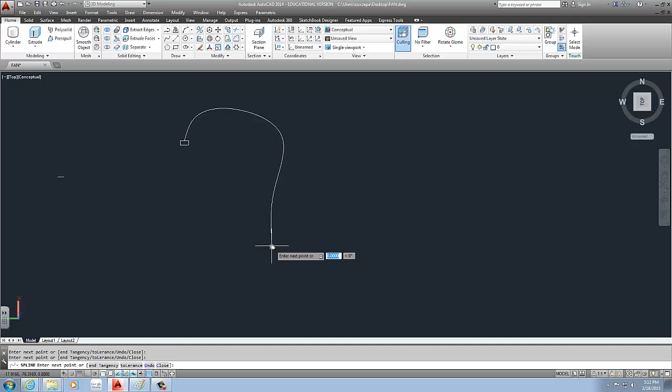So for this loft light, I'm just going to do a quick sketch of it so you understand what I'm looking for. It's going to be a quite simple design. But I can't really give you the dimensions because it's going to be up to you to decide what dimensions you want to place, and what shape you want to make it.

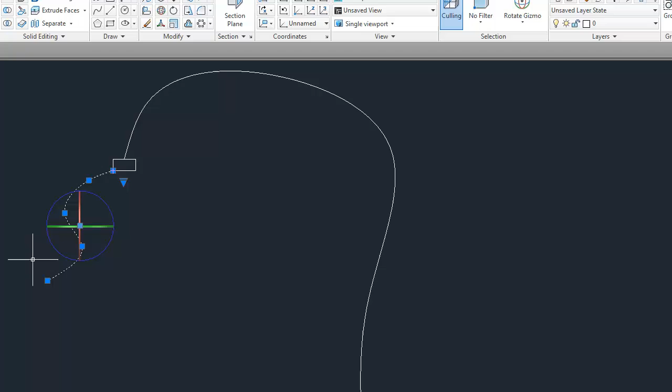So that's pretty much what we're going to be designing. Very simple light fixture for your desktop.

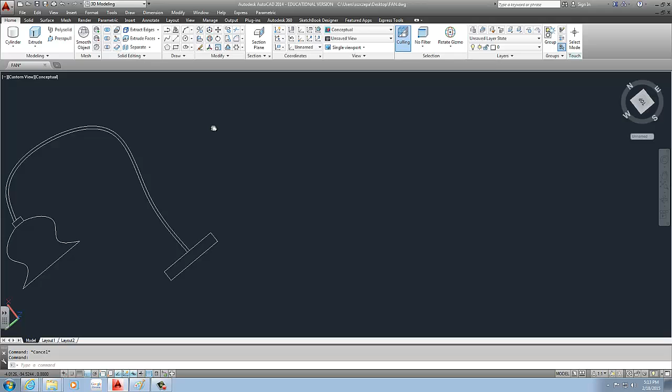Now to do this, there's plenty of ways you can do it. The simplest way is pretty much what I just did, is you draw yourself a reference drawing of what you want to do, what sizes you want to place, and we start out with the base. Pretty simple, we do a cylinder that is diameter of 6 inches.

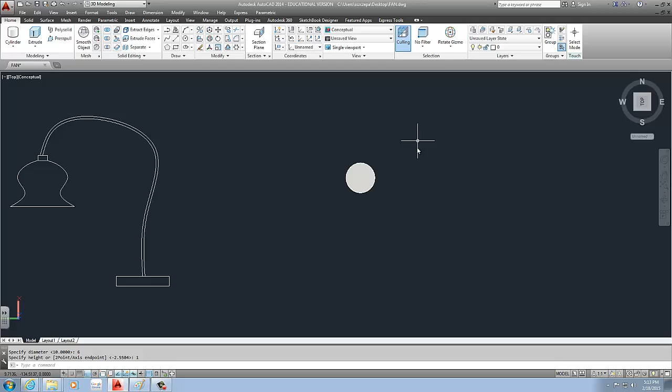We'll do a 1 inch high. You can change that as you wish, it's fine. Now we need to create the actual pipe, or the wiring pipe, or whatever you want to call it.

That's going to be like a flexible, so anybody can adjust it as they wish. I'm going to go into like a left view for reference, and if you want to create a line for the height you wish to keep it, you can do that as well. Change that to left.

I'm going to do a spline. Well, first of all, I'm going to do a reference height of 24 inches. And then I'm going to use our spline to create a free-shaped kind of wiring harness.

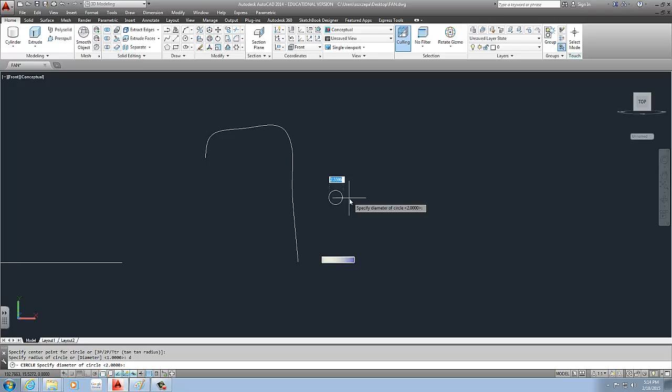Accept that. And I'm going to use a cylinder or a circle shape that is diameter of 1 inch. And you don't have to put them together to actually sweep it through.

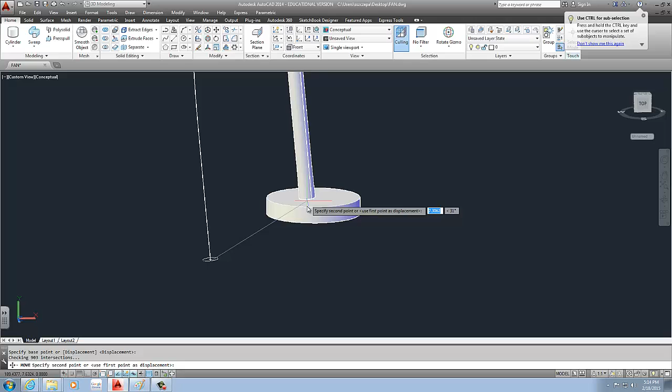All you have to do is use the sweep command. So under extrude, you go to sweep, you select the circle, enter, you select the path, and it does it by itself. Don't have to worry about anything about that. And then you can place it into the center of your base.

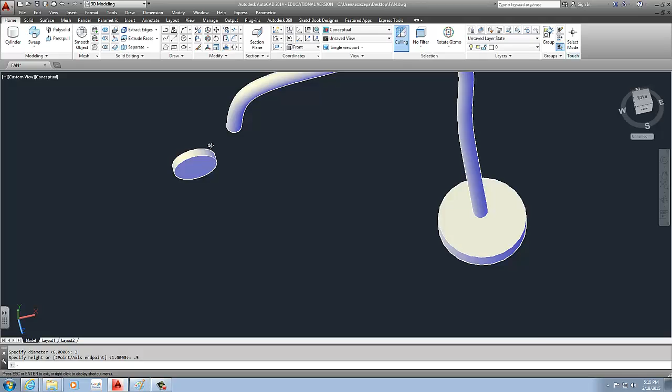So that's one, and then finally I'm going to create the metal portion before the glass for the light. Pretty simple again, cylinder, this time a diameter of 3 inches. And I'm going to do a 1/2 inch thickness. Now you might need to rotate this around to accommodate your design.

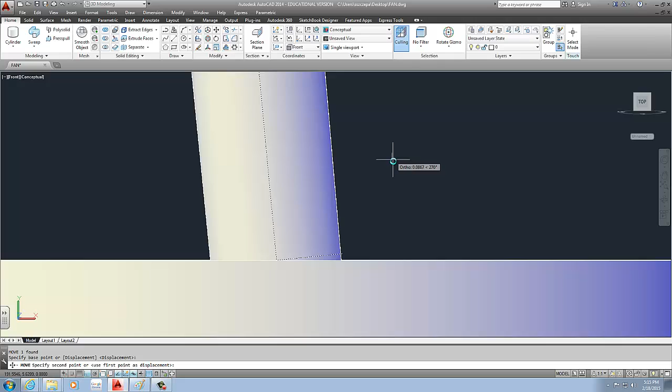So go ahead and do that. Now if you're not liking how your path of this pipe went, and it's crooked, or you want to cut straight into it, what you can do - see it's not overlapping here - I'm going to move it down. That's one option, or you can slice it to make it an even cut at the bottom.

Both will work. I have this, okay, and then finally I'm going to create the actual light or the glass. To do that, I'm going to use the spline command.

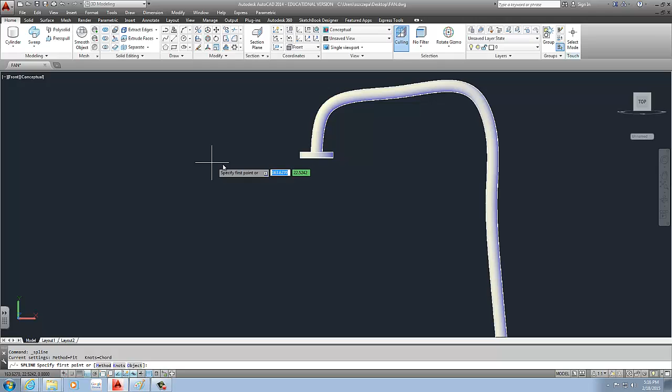But before I do that, I want to create the top and bottom shape of my light. The top portion will be a circle with a diameter maybe of 3, which is the exact same as that cylinder. I don't know where I lose it.

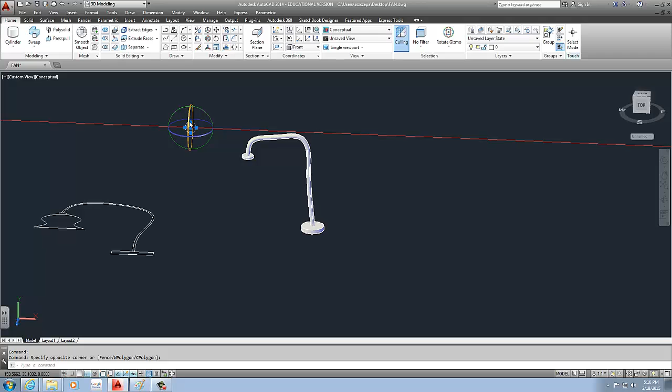Oh, so I might have to rotate it. Yep. And I have that piece. Now I want the base to be a weirder shape. I actually want it to be a spline, a free-formed shape.

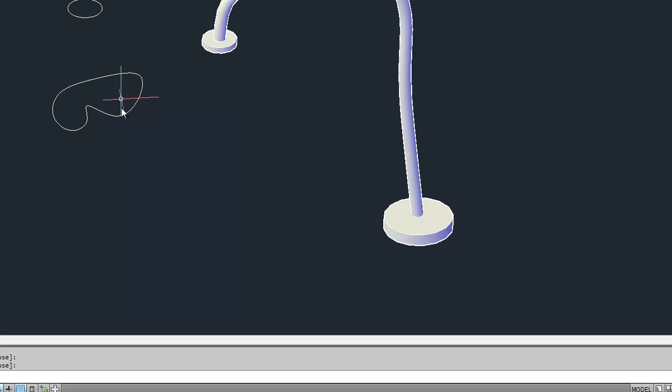This is probably impossible to make, but it should be interesting. Make sure you have ortho on when you're rotating, so it's exactly to match. Give it a distance that you prefer, doesn't have to be too far. Mine's about - I'm gonna do 6 inches.

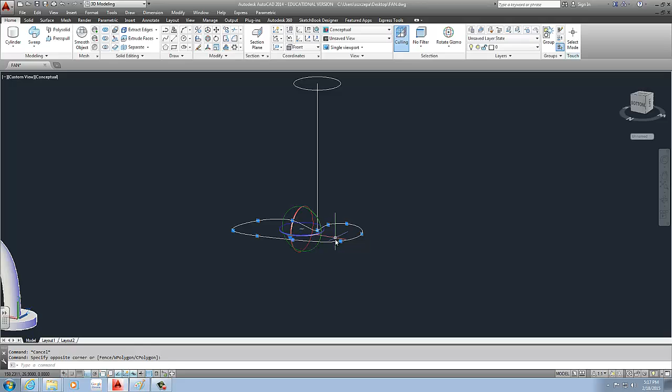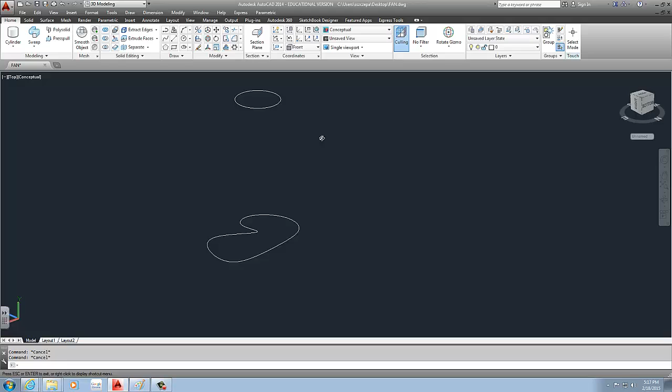So I'm gonna snap on my lower portion to my upper portion, like so, and adjust it to be somewhat in the middle. You can rotate into UCS or use the ViewCube to view and see where the middle is compared to your part. Once you have that, you can use this to create your loft glass, or what I try to do is make a copy first, to see what I come up with doing this loft.

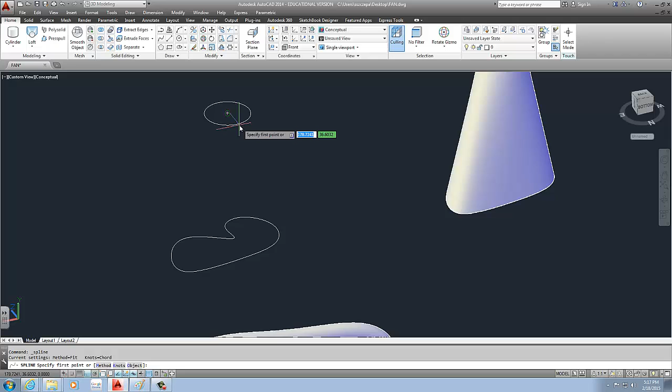So I get this shape here, or I try to give it paths that it can follow, usually by the quadrants. Is my quadrant active? Yeah, it is. So what you want to do is either select—sometimes you won't be able to select the quadrant, sometimes you will—and you create a shape that you want the loft to follow.

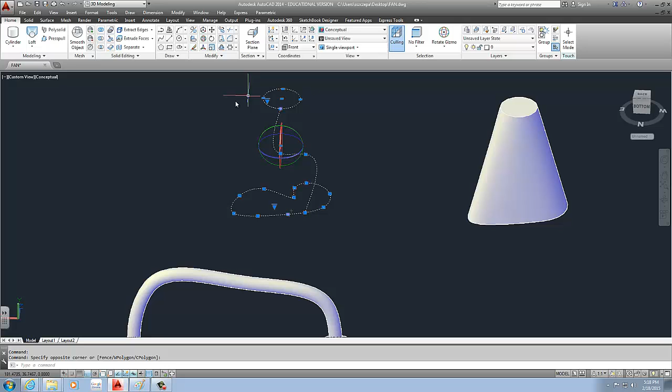So here's another option. I gave it one path. If it's one line, I usually call it a path. If it's more than one line, it's a guide. And if it's a path, it has to follow the path. If it's a guide, it just gives it a guidance of what shape it should be going to.

Okay, so that turn is too big. My guide will not work. And you play around with those shapes, path.

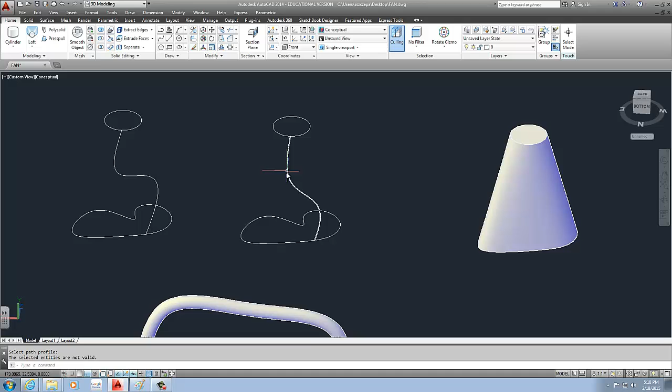Is this creating a solid, or is it just creating a surface? That's going to create a solid. So the only problem is trying to adjust it to make it work. See, if it's turning here too strongly, it won't work. So we have to adjust that to make it a possible part.

Now if you keep on snapping and it won't work for you, what you may decide to do is use a line as a reference and snap to that line.

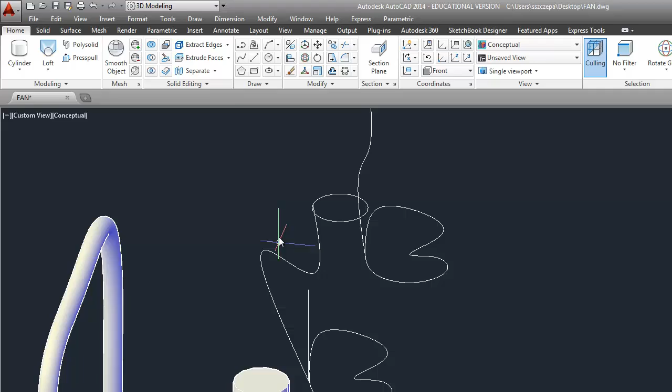Basically, loft just conforms one surface at the top to the bottom. To the bottom? Yes. Okay. But then you can use lines to guide it, or you can use a line for it to follow, that it has to follow. So for this one, it is a path.

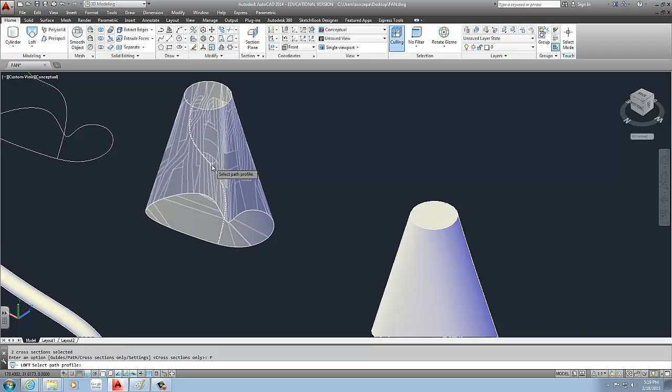There you go, so it follows that path. So you can really come up with some very interesting shapes. Now, the path worked on this one with a more reasonable shape. This one has an unreasonable shape—there's no way this can turn that fast and make it into that shape.

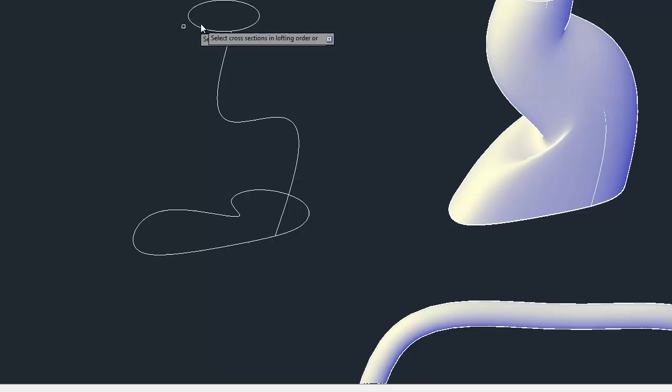But if I use the loft, I can use it as a guide. Didn't work, it's still too sharp of an edge. Try it one more time. I just adjusted it.

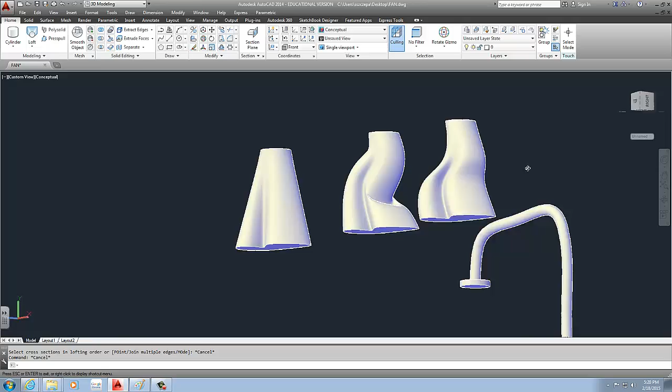There we go, and I created a new shape to that as well. All these shapes are nice. The only problem is once you create the shape—whoa, this one has a weird graphical error. It's there, but then if I zoom out, it crashes.

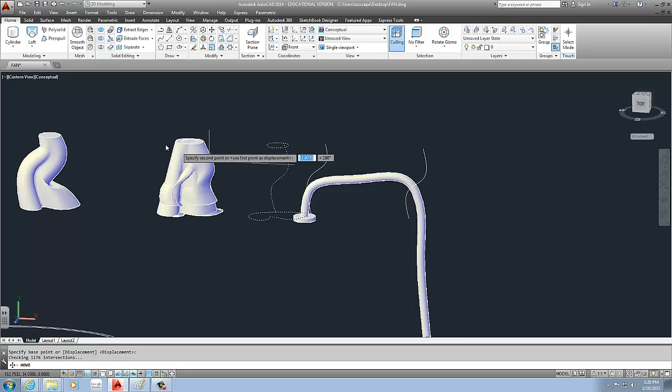But don't worry about that—once you print it out, it's going to be normal. What you can do is shell them out. The only problem with shelling them out is your computer could crash, so be careful when you do it. Make sure you save your work before you do any shelling of a surface or a complex part.

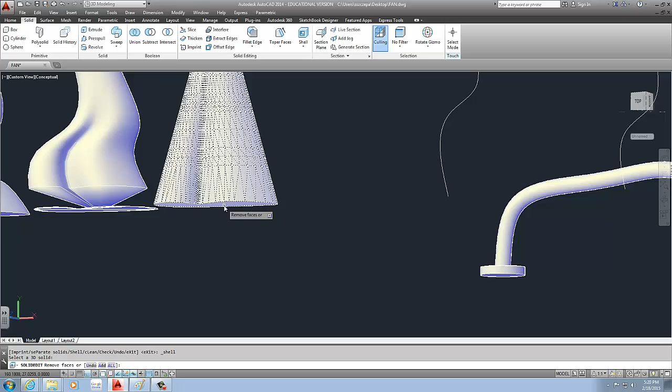But I'm going to use the shell command. I'm going to shell, select the object, select the surface I want to remove—which is usually the bottom and the top—and give it a thickness of 0.125.

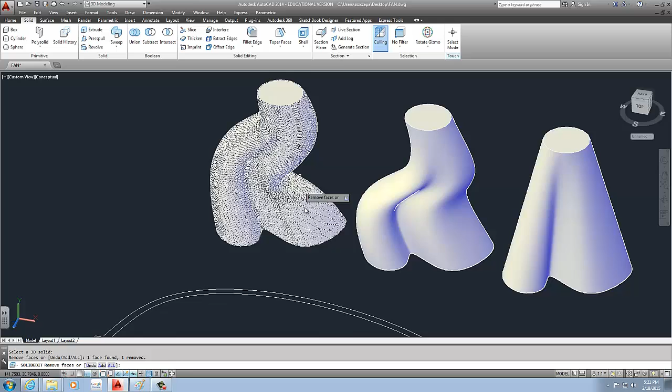Yeah, it crashed on me. Let's try it on this one. Shell, select... oh, it's not working. It's overlapping itself, that's why it's crashing. This shape is not something it wants to work with.

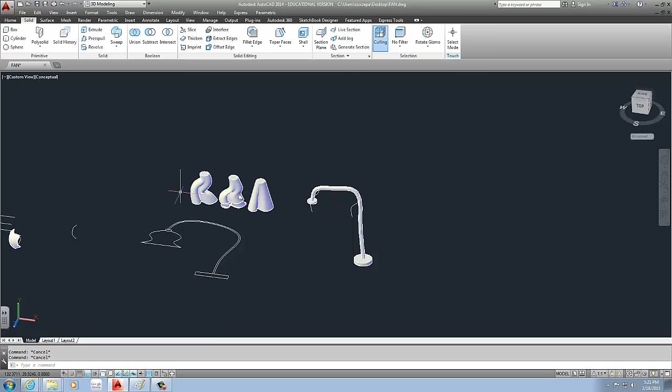But that's alright, we can use—actually we can use this shape here. This will have to work. Huh, it's not even doing that one. It doesn't like that curve.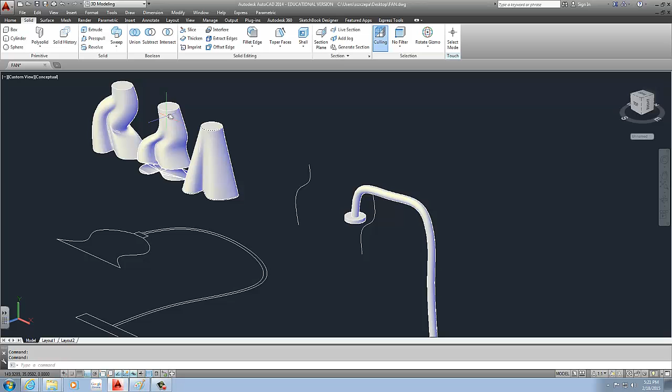Alright, so we leave it as is. We don't have to shell it at this moment, but you can decide which one you prefer, or you can do many more, and place it to the bottom center.

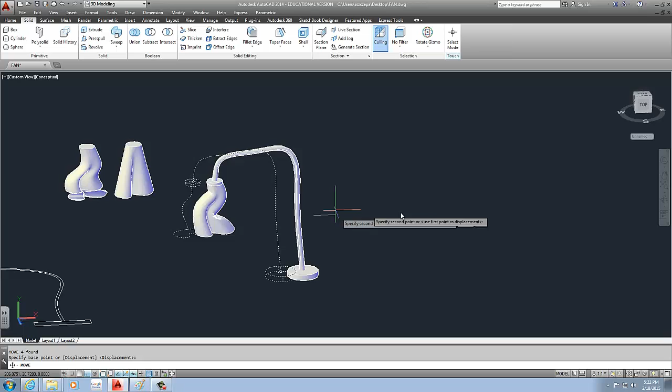Deleting these additional lines will clean up the drawing, and you have some sort of unique light fixture. Now if you guys want to go the extra step—we'll get into more about rendering later in the semester—but if you want to start placing material on your objects, what you want to do is go to your render tab.

There is a materials browser. It's pretty simple—all you have to do is go to material browser. It will open up a palette somewhere on your screen.

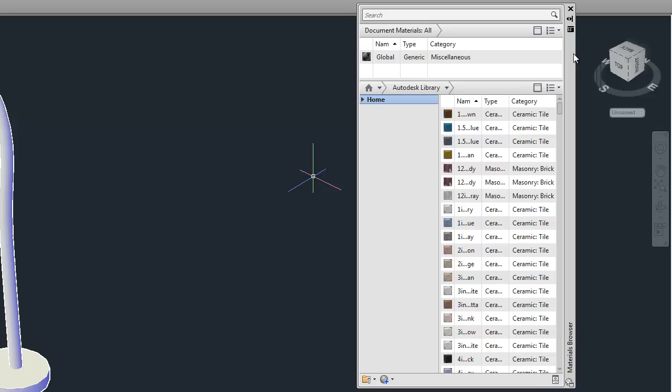There we go, where you can select material based on a few different options: either a category, a type, or a name, or the actual color. It shows you a preview of it.

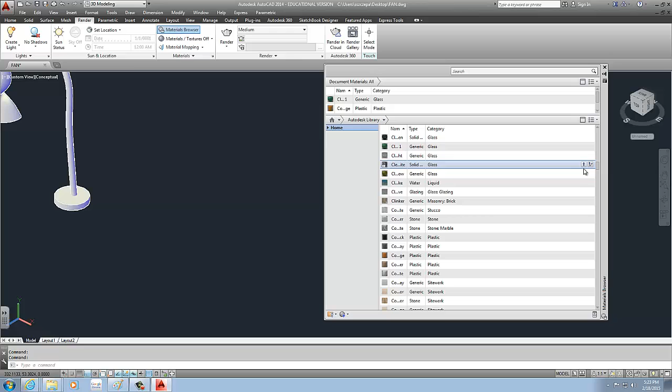So for glass, you want to probably put that into the glass material, and just throw in some weird colors here. Give it a unique design.

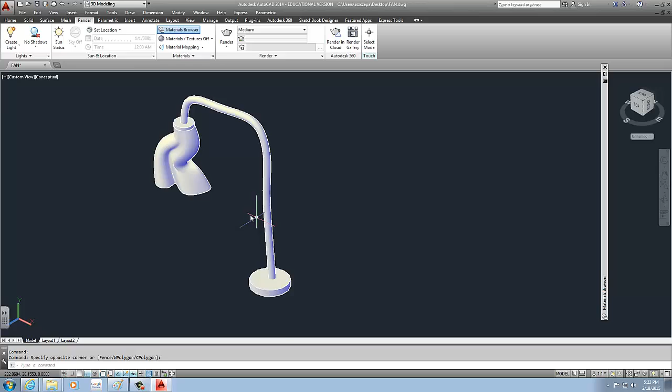Once you have those materials placed in, the easier way of placing the material is just dragging and dropping it onto the surface, onto a solid object. Once you're happy with what you decided, or if you're not sure, what I always recommend, since your school computers aren't that good, is changing from conceptual to realistic.

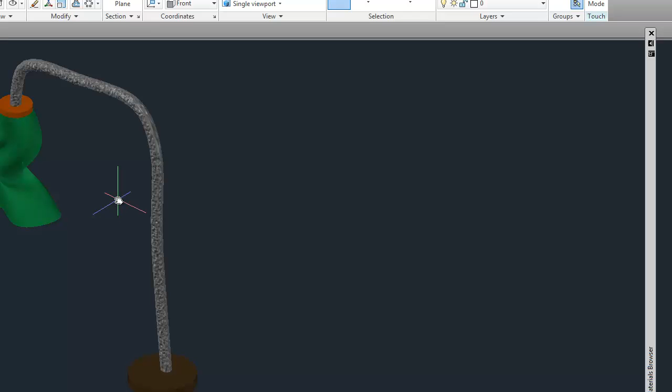That usually gives you a decent preview of what material you placed on your solid object. As you can see, the actual glass is see-through. This is some concrete I placed, and two different other materials. You can change them as you wish, or leave them as is.

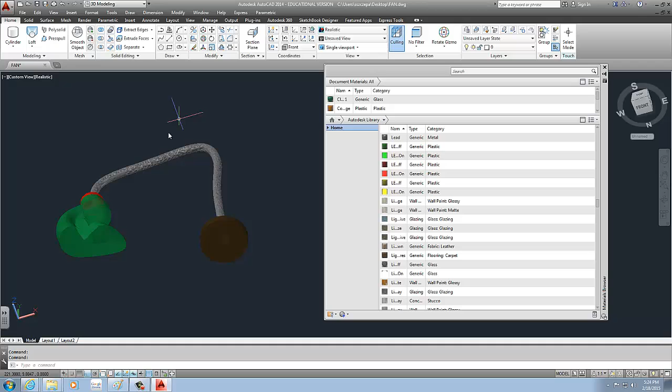We'll actually show you guys how to put an actual light inside, or how to make the material glow. For this one, I'd probably recommend making this green light glow.

But yeah, that's a quick tutorial of adding that material to your product.

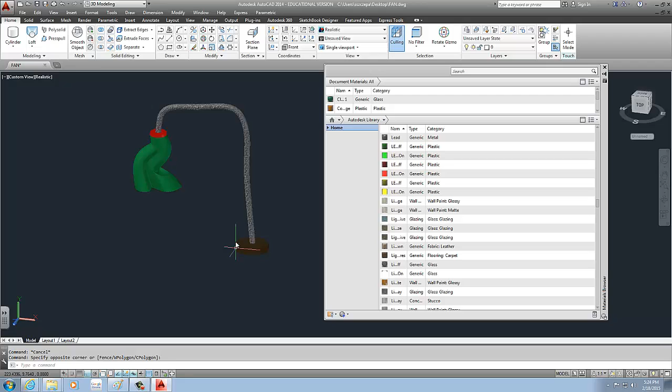Now, if you guys don't like the shape of this, or it's too complicated using the guidelines, you can even go with a simple ellipse. Sorry, that's gonna be very big though. And let's say a hexagon.

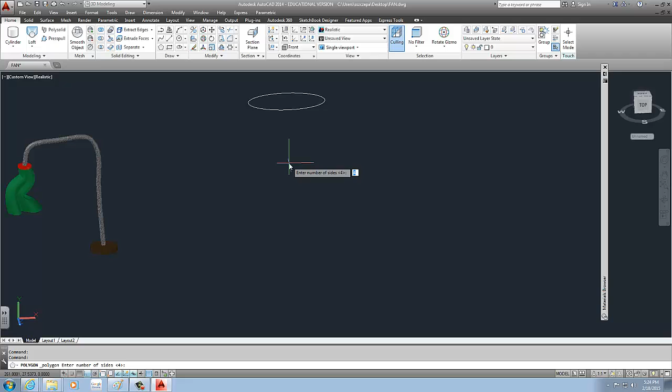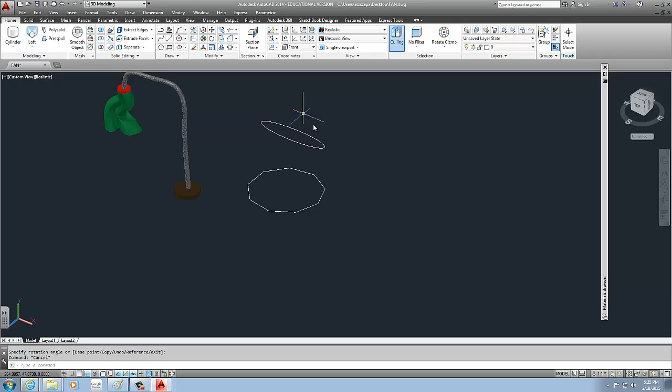Let's grab it and just loft it, and you'll come up with something. I think it's a rotate - wrong rotation. There we go, loft this out, giving you a unique shape.

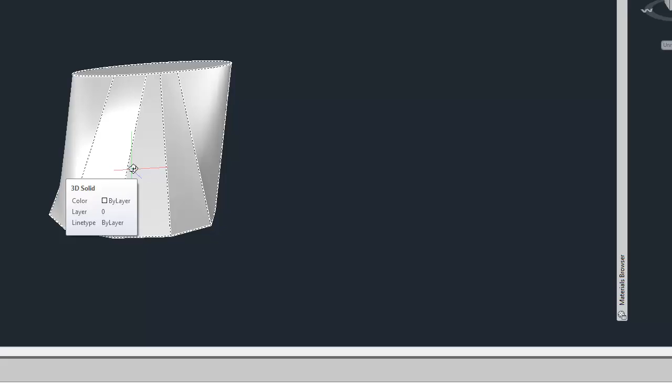Now once you have a loft object, and there's surfaces like this - actually it's a solid object - you can edit the part as is. This is a lot of playing around with, but if you feel comfortable with that, what you can do is hold Control, select a surface, and you'll see a point. That's an adjustment point where you can actually adjust the part.

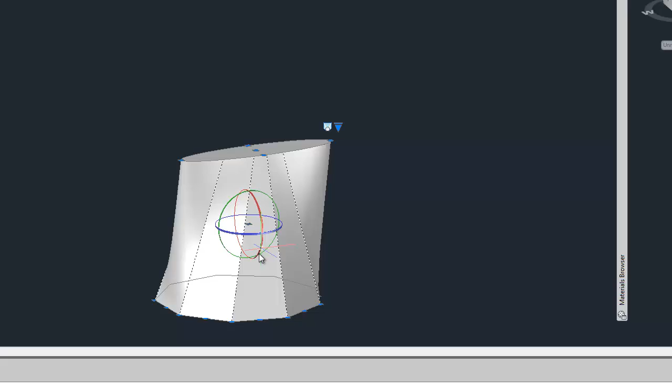Just turn off ortho. Let's see if I can do this. Yeah, that's what you don't want to set - the center point is actually set to rotate. That's not going to help you.

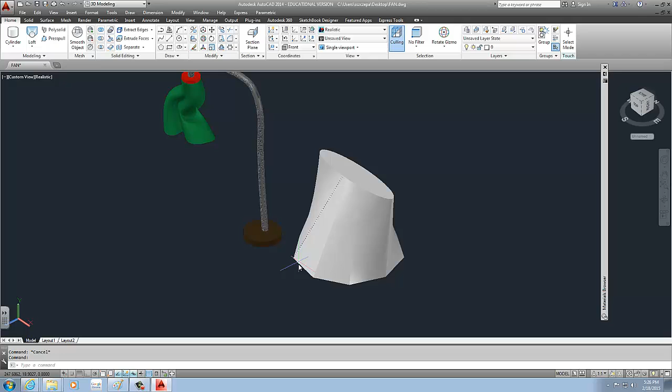What you want to do is select edges, and those edges, while you hold Control, will extend or change in size. We'll get further into that a little bit later. I don't want to lose you guys in this.

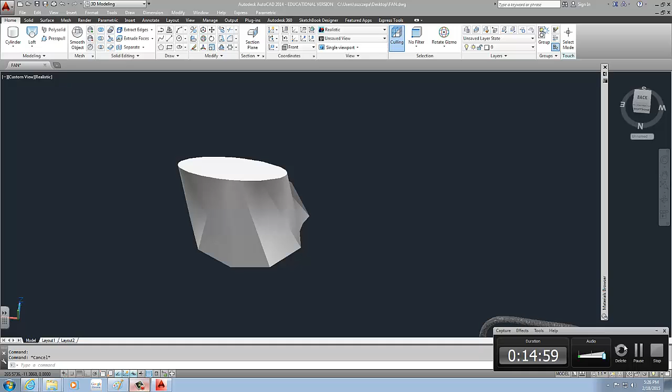We'll actually use this more into mesh options, because mesh is really good for that. So, recorded. For this project, I'm expecting you guys to do some kind of base.

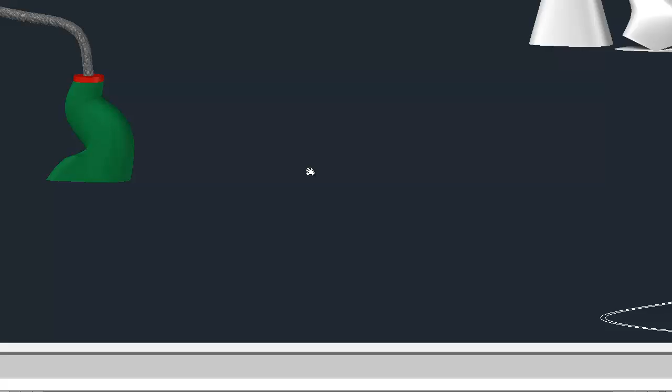Doesn't have to be a circular base - a swept circle or any other shape. So you're using the sweep command, you're using an extruded base, and you're using a loft command with guides or without guides, or with a path or no path. It's just going to get you more comfortable with using 3D as you're drawing.

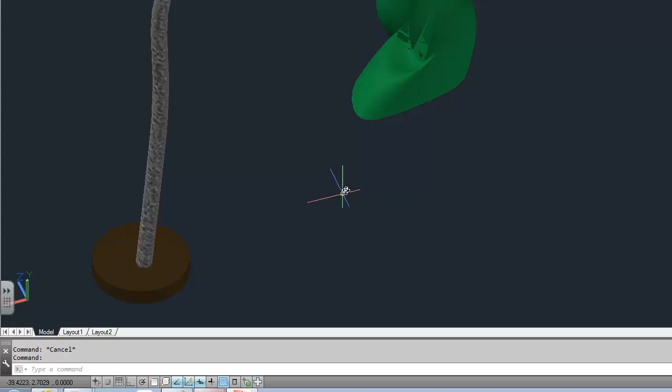Make sure you rotate your parts so they're aligning so you can make it work. Also, you have to keep an eye on your UCS, otherwise you're making your life a lot tougher. Now if you wish to put the material, that's great. If not, that's also acceptable.

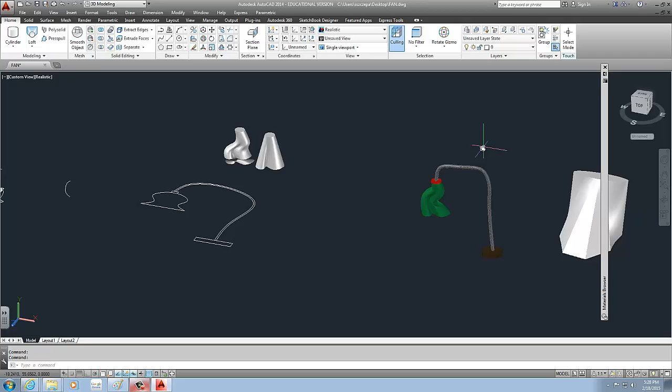Kind of went on the other side, but it doesn't look quite like what I had before over here as a 2D sketch, but you guys get the idea. Actually, I can probably still work with this. And actually, this one's going to be pretty simple.

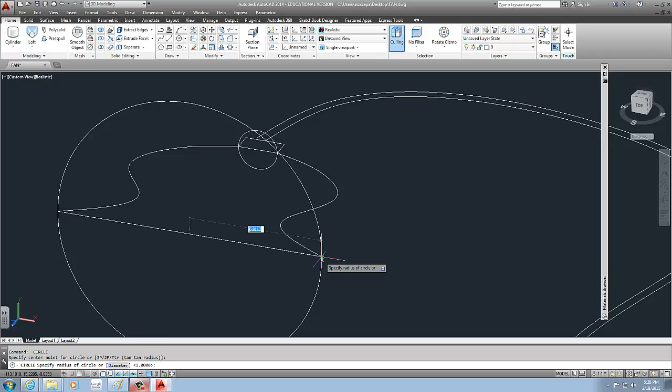Create a circle with the O-snap, the center, and a center here. I can loft these out with guides.

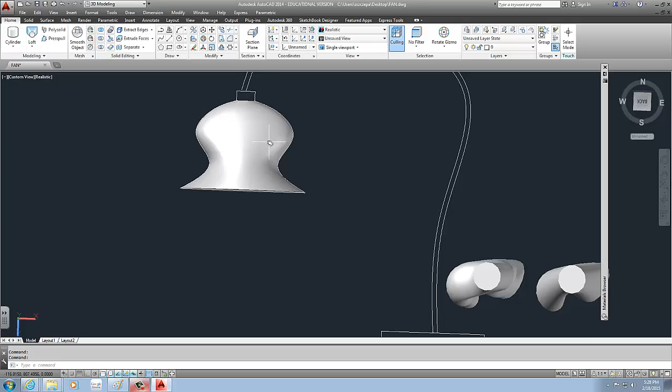So instead of doing what I just did, I could just do that - that also works. Same with the cylinder here, which I can just do extrude. Snap onto that. And I can also create a circle here.

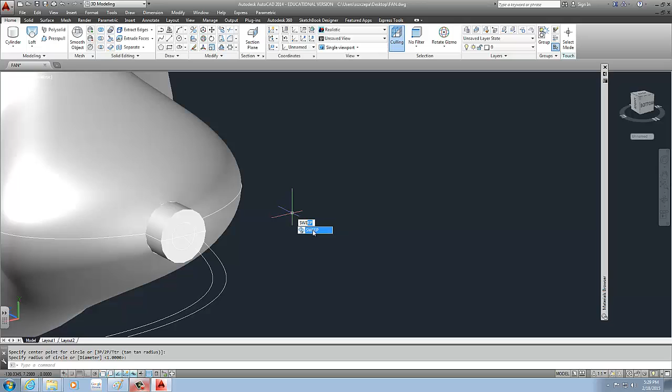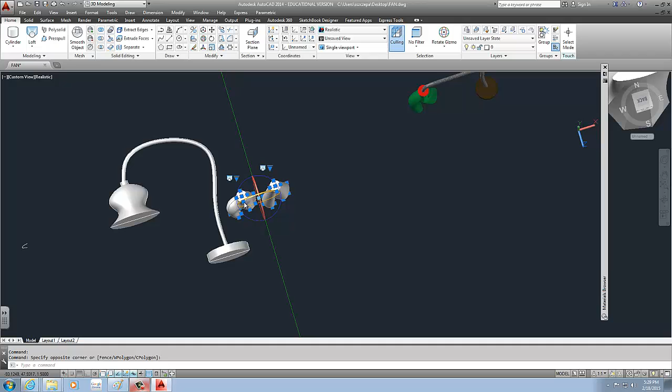I think it was this wide with the sweep command. I select the circle, select the path, and I do the final step, which is the base. I trace it over, extrude it out based on that distance. So even if you do a 2D drawing, you can really make it fast into a 3D part without a problem.

Again, once I have that complete, I can just add material to it. And remember, I'm in realistic mode, so that way I can see a preview of the material as I place it.